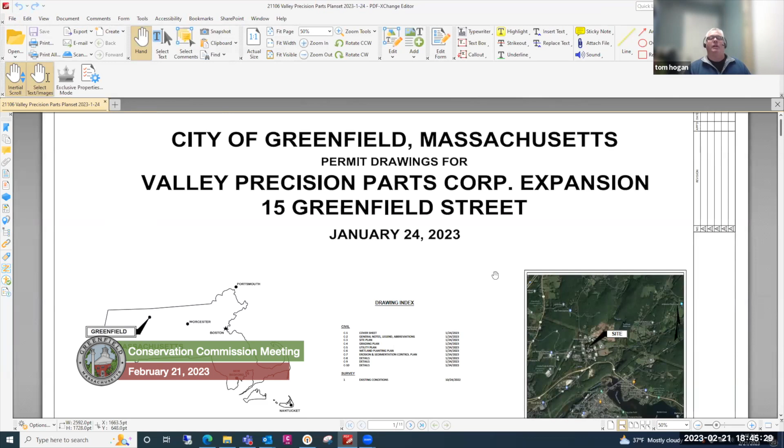Oh, I thought I saw Steve. He's muted. I'm sorry, can you hear me now? Yes, sir, sorry about that. No worries.

My company goes back in Greenfield about 50 years, and we've been at 4 different locations in town during that time. We've been at our site on 15 Greenfield Street since 2008, and it's been a great location in the industrial park for us to grow. At that time we had 28 employees; we now have 205 on the site.

So we've done 2 previous additions on the building. We renovated it in 2008, added 5,000 square feet towards Adams Road, as you see on this map, and then the new building, which is disconnected, in 2018. That's allowed us to go from about 25 employees to 205.

If you drive by our building right now, it's kind of a mess, which we don't like, meaning there's nowhere to park, particularly at shift changes. So we were able to acquire the land behind us, the parcel where the proposed larger parking lot is, which is a lot of wetlands, but there's usable space out front. We thought it'd be really attractive for us to continue to expand employment by being able to park in that area.

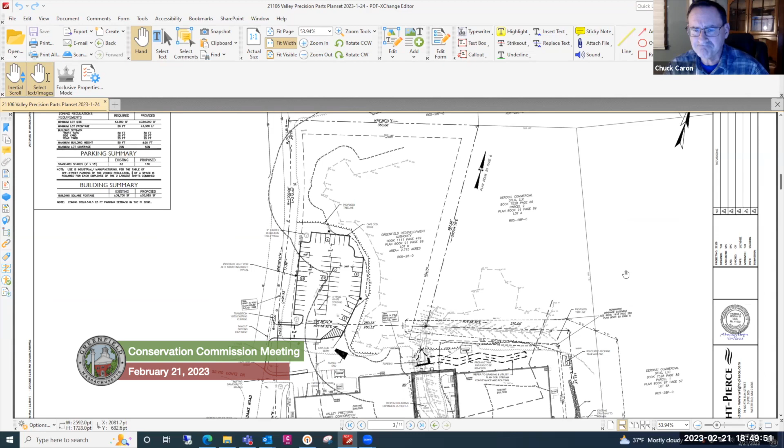For resource areas, there's also a strange feature that runs along the back property line. It's a fairly deep ditch that has a little bit of evidence of flow in it and some wetlands vegetation along it. From what we can figure from the history of this site, it looks like that was constructed in the late 70s or early 80s when this industrial subdivision was originally developed, to divert that stream channel between the two buildings now. Except either they never finished it, constructed it wrong, or didn't maintain it, because that channel picking up flow from the intermittent stream isn't receiving any at this point.

So we have the buffer zone from the BVW that extends into a good part of the work, and we have the intermittent stream channel and some bordering vegetated wetlands in the area between the buildings where we're proposing to do work. I don't know if you want me to get into mitigation now, Tom, or go into more details of the design first. I had wrapped that up in my next segment, Chuck. Okay, maybe I could go over them and we'll find something of particular interest to the commission.

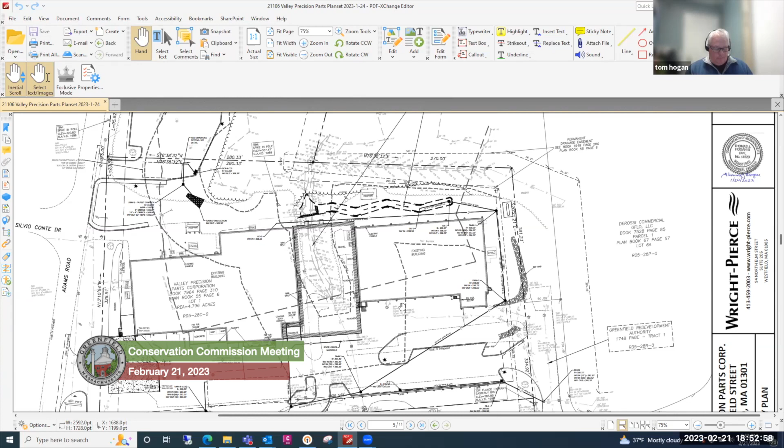But in the overall big picture, we understand the presence of that area between the two buildings is currently carrying water, so we've developed a mitigation plan to address it - in essence, turning it counterclockwise about 90 degrees or so and mitigating what we see there at greater than a 1-to-1 ratio. We also, in order to comply with our stormwater management obligations, have provided stormwater control for construction activities as well as long-term operation and maintenance plans and post-construction operations.

Our stormwater management best practices proposed include deep sump catch basins, Contech stormwater treatment units, ADS isolator rows, slope stabilization measures, and outlet pipe energy dissipation. Using those means, we're able to demonstrate balance at our analysis points as shown in our stormwater management report. As Mr. Capshaw indicated, there's a variety of things occurring at the site, but taking the whole site as a whole and looking at the mitigation for each individual component, we believe the proposal as shown achieves the performance standards under the Act. There's a great deal of detail in the stormwater report as well as the plan set, and we'd be glad to answer any questions you may have.

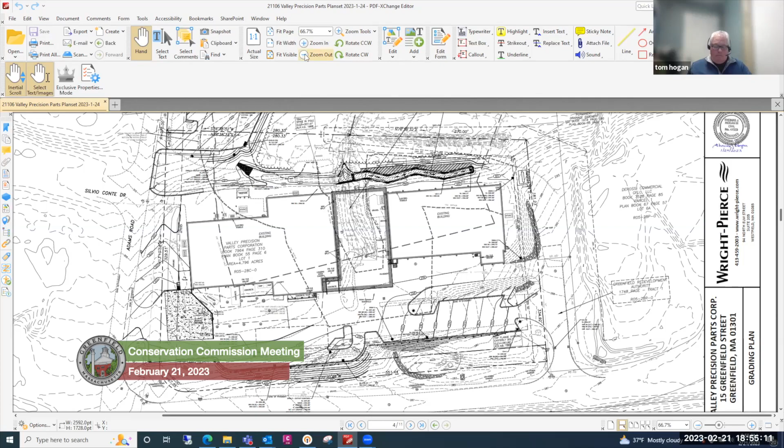Do we have any site visit photos of that area? Yeah, I can pull those up.

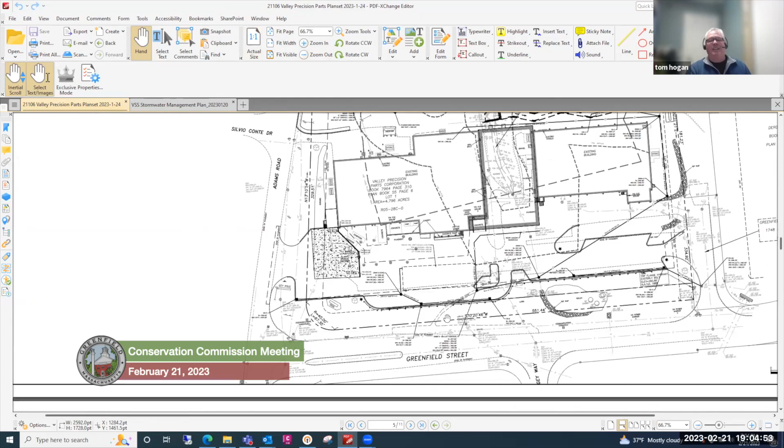I would say that we tried to balance the best we could while keeping a responsibly graded parking lot that'd be safe for vehicles and users, and again, with the environmental considerations of the slope stabilization. But our goal was to keep it as flat as we could, as natural as we could.

Is it the case that you'd have to bring in fill, or will somehow the removal be used? It's not a big swing either way, and to do that calculation I would have to figure out the volume that would need to be brought in anyway for the gravel base for the parking lot. Just looking at it, I don't think it's a big swing one way or the other. I'm not seeing a big one, cut versus fill. I think the idea is that's going to be as close as we could make it.

I think the biggest thing we would want to understand from that data is whether there would be a significant impact on the resource area. So if that information will help us make that clearer or won't, I don't know, that's my personal opinion on that. I'm happy to provide it, it's not a very intricate calculation, we could certainly pull that together.

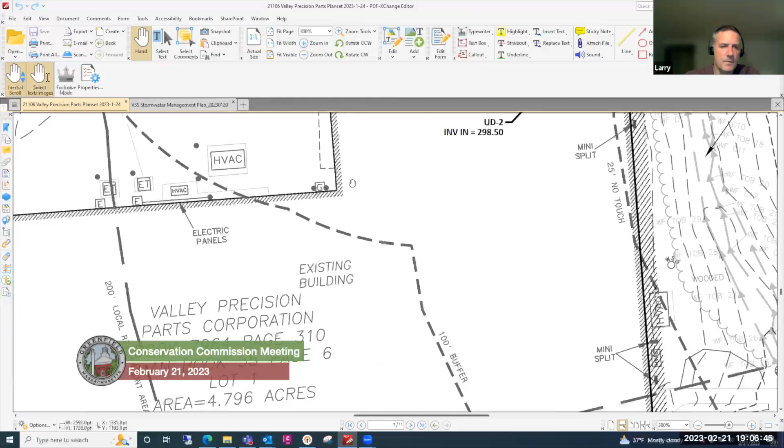While we're here, there's another heavier dashed line that overlaps with the 100-foot buffer that I don't see a label for. Can you explain what that angled dashed line is? Yes, that's the 200-foot local riverfront area. So that comes down, comes across, and then goes back up, and that's associated with the intermittent stream, then the closed drainage system that goes underneath the existing. Does that help? Yes, thank you.

Can we, while we've got the plans up, talk quickly about the stormwater management plan? Because there's a lot going on here. Yeah, there is, it's complicated. There's, like Mr. Capshaw said, really three sub-projects within all of one here. So this is the utility plan.

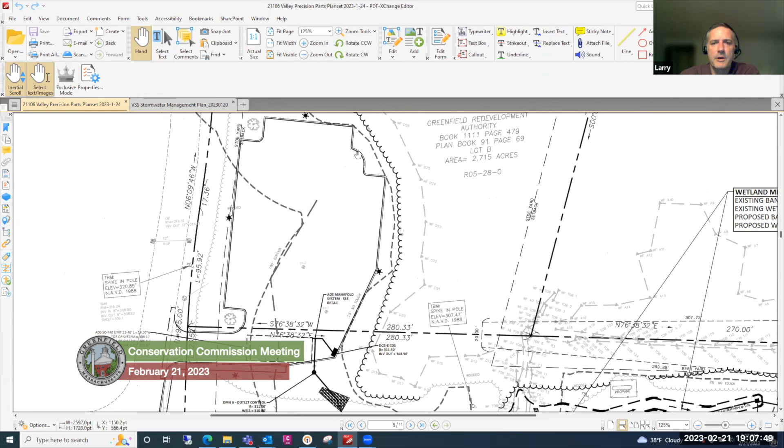Pretty much the new paved parking area will be pitched towards a low point where there's a double grated inlet. That'll go through a proprietary CDS unit, which will then overflow into the subsurface ADS system. Larger storm events will then, after going through the ADS system, go through a multi-stage outlet control structure prior to discharge.

So that structure has been sized for the 10 and 100-year storm events, and that output is provided in the stormwater management report. So those are the proposed utilities within the expanded parking area.

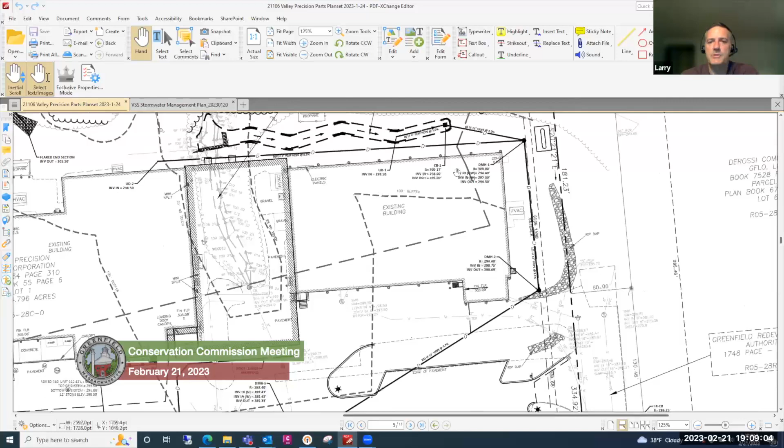We can talk a little bit more in detail about the wetland mitigation, but this conveyance channel will then go to an area inlet, be diverted around the existing structure and tie back into that same closed drainage system that goes underneath the existing parking lot and then outflows adjacent to Greenfield Street. So there's deep sump catch basins, drain manholes, HDPE pipe that will then tie into the existing, I believe it's an 18-inch pipe at this location here.

The expanded front parking area is pretty much the same thing, where we're using deep sump catch basins at the low points of the site along the front, which will be tied into a CDS unit as well at this location. That'll pre-treat all the stormwater entering into the ADS system.

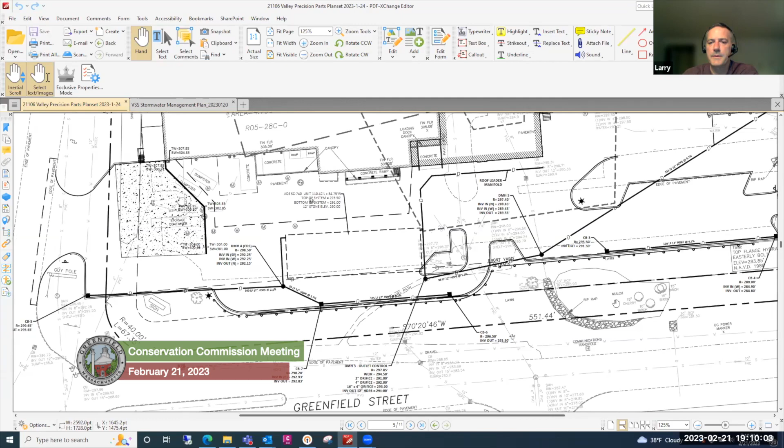This system will also have a multi-stage outlet control structure located right here, DMH3, and the overflow or outflow associated with that will then also tie back into that existing closed drainage system prior to outflowing along Greenfield Street. So there's basically three areas of stormwater management we're proposing: the expanded front parking area, the reroute around to the existing, and then this larger front subsurface pond to mitigate the increase in impervious area.

I have to say, I'm a little worried about the parking area and the impacts to the wetlands. If we're changing the grade and routing the sub-watershed flow, under existing conditions going from north to south, from south to north, how that's going to impact that wetland, and to go all the way up to the 25-foot and inside the 25-foot makes me a little bit nervous.

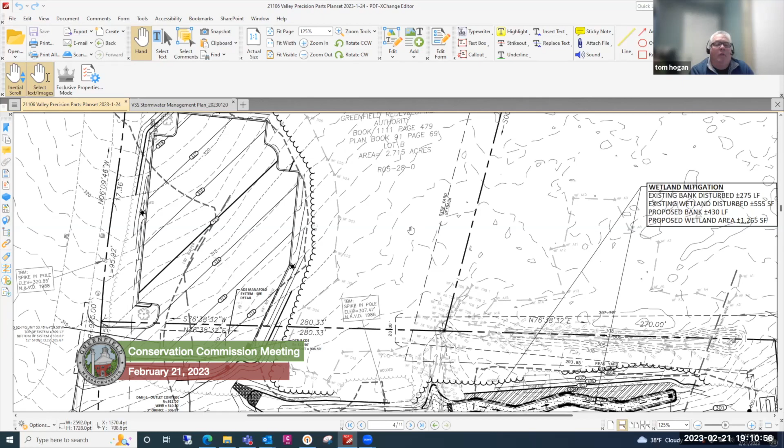I understand and I appreciate that. When I look at it and I think about the contours and how that wetland system is -- Larry, can you zoom up just a little bit? Yeah, I was just trying to, on that same sheet. I just want to go a little bit higher on that, same sheet.

So if we look at the contours here and I look at the cut slope, when I think about adjacent wetlands and the concern I normally have -- people have different concerns, but mine is if I was going to have a major cut slope near a down gradient system, how I might intercept water that would otherwise be feeding it. The contours on the upper areas, aside for 2 or 3 we have, generally run perpendicular away from our parking lot -- perpendicular in a northwest to southeast fashion -- so that our parking lot wouldn't be acting as a subdrain in essence.

And then as you go down to the bigger part of our parking lot, it quickly turns into a fill situation. Larry, can you go to the northeast part of the parking lot where the curve is, just to circle that area? The new parking lot out back, yes.

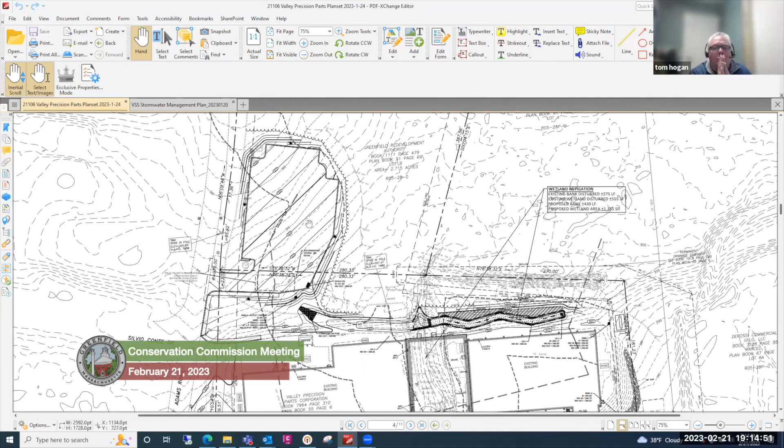I would hope it wouldn't intercept with groundwater -- I was thinking more about surface water. Just that the natural subwatershed is currently shedding from south to north, but after the establishment of 58 parking spaces, that whole area will now shed from north to south. So how would that impact the adjacent BVW? Well, it's a very small part of the surface water tributary area, because you only have surface water runoff feeding into the wetland there, from the wetland line to not even quite to Adams Road.

Anything to the west of Adams Road is captured generally in the roadway system. Even east of Adams Road, you can see there's a slight rise. So from about where that tree line is towards Adams Road, it's going to Adams Road and not into this wetland right now.

Is that in your stormwater analysis? Is that explained in your justification? Yes, we provide the subcatchments and the time of concentration, the flow analysis lines and the rates and all of that. That is correct, it's towards the end of the report.

If I could just add real quick too, as Chuck and Tom were saying, the grades of Adams Road are pretty much pitched from northeast to southwest in this area. Although there's a defined crown down below here, the upper portions of Adams Road are pitched to the southwest a little bit as well. So really the subcatchment area is from the edge of pavement, somewhat a little bit into the road. So the areas that shed water or subcatch stormwater runoff to this wetland are pretty much the same.

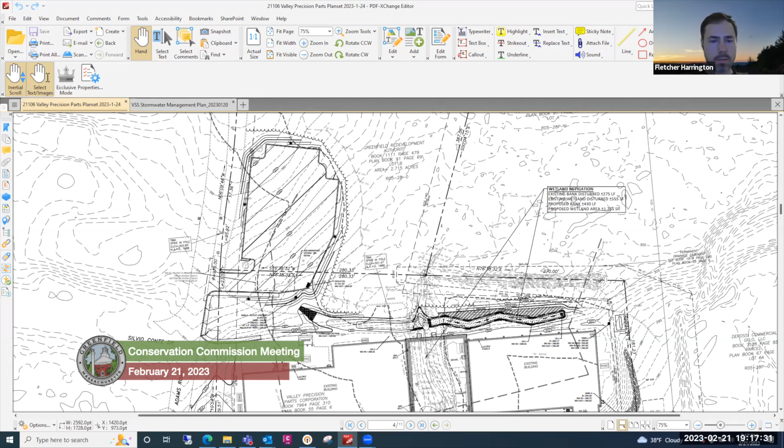So right now there's a small drainage ditch from a drain or culvert type structure going from west to east, that we saw in one of the pictures, that connects to the current system.

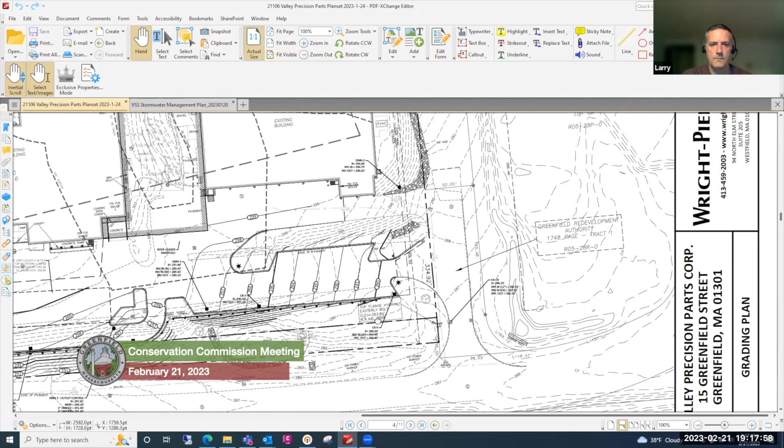That is now going to be this new one. I think he's talking behind the western building. If you go to roughly the southeast of the parking lot as it's on the plan there, in the northwest of the plan. I'm just wondering about this drainage structure, you can see a big sort of black area right below it. Is that an outflow? Is that water just shedding from the parking lot, or no?

That'll be the proposed outflow from the stormwater management system. It's shown with some fabric and riprap.

So that's surface flow, right, that proceeds to the new channel in this plan? That is correct, yes, based on the grades and contours, combines with the southerly flow that's existing. And so does that significantly increase the water that's going to be loading that new channel compared to the existing channel, or no?

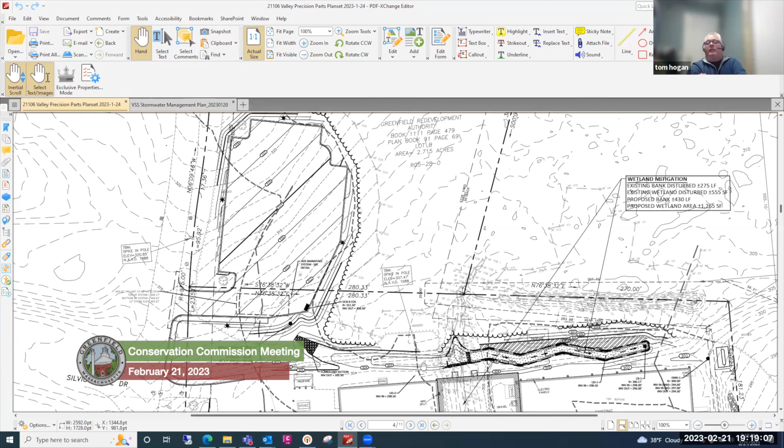No, we don't think so. We think that because of the mitigation in the parking lot, the infiltration that'll be there, plus the slowing volume of the flows, we tried to make it so it would be very similar to what is there today. So more or less the drains that take things underground will offset what might otherwise be more flow, or more unimpeded impervious flow.

Yeah, that's the idea. The subsurface best management practices that we're proposing are designed to offset any increase in the transmission of flows over the impervious area.

So what we're also trying to say is this outlet control structure balances through the storage volume, releasing controlled flow to mimic what's there today for those same storm events. So it's sized with a low flow orifice for the smaller storms up to a 2-year storm, then an orifice for a 10-year, and then a weir for the larger storms. That'll provide more retention time within the system, and then balance it through the outlet control structure.

Got it, I see the flow better now. In that basin, is there some type of treatment system in it to catch solids below the parking lot there? That is correct.

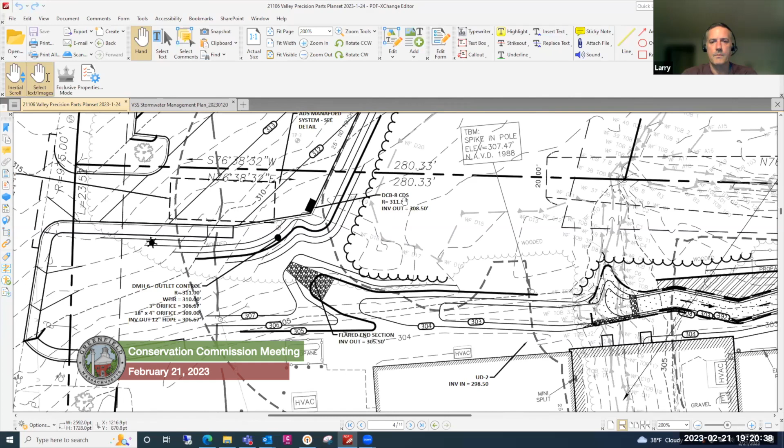It's a Contech CDS swirl chamber proprietary device that can be a grated inlet, so that'll be coordinated through the shop drawing process. And then the system itself will be an ADS crushed stone with the arch type of system, and that has an isolator row as well for pre-treatment prior to spilling over into the other adjacent chambers. So there's kind of a belt and suspenders for TSS removal, spill prevention, by the combination of those two units.

And the TSS worksheets are within the stormwater management report.

While we're on this topic, is there a detail of that system that you could show, to provide a visual? Sorry, I'm just scrolling quickly.

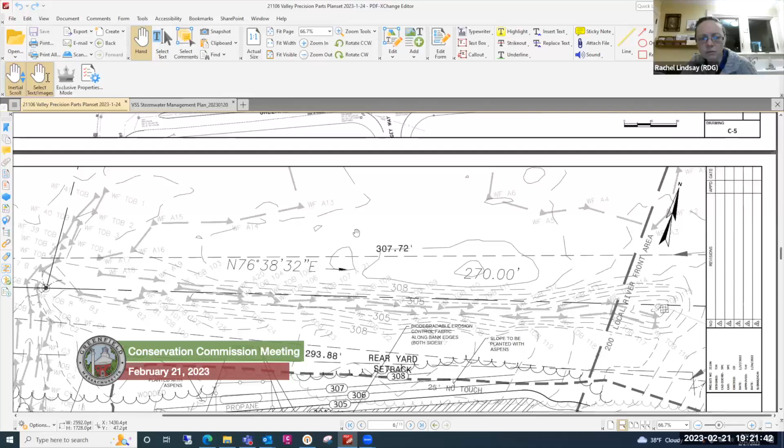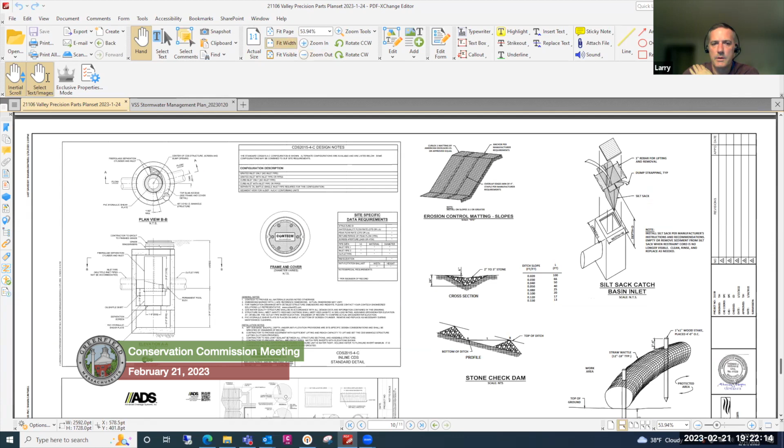And I believe on this sheet, this is the proprietary Contech CDS swirl chamber unit, so there are 2 of those proposed. And then these are the detailed cross sections of the ADS system - the stone, the fabric, and the ADS arch type system. There's a manifold system that balances all of the stormwater going into each chamber prior to it outflowing through the outlet control structure.

As detailed in the stormwater management report, there's, like Tom mentioned, long-term operation and maintenance, periodic inspections, cleaning, and so forth. That's all described within the stormwater management report.

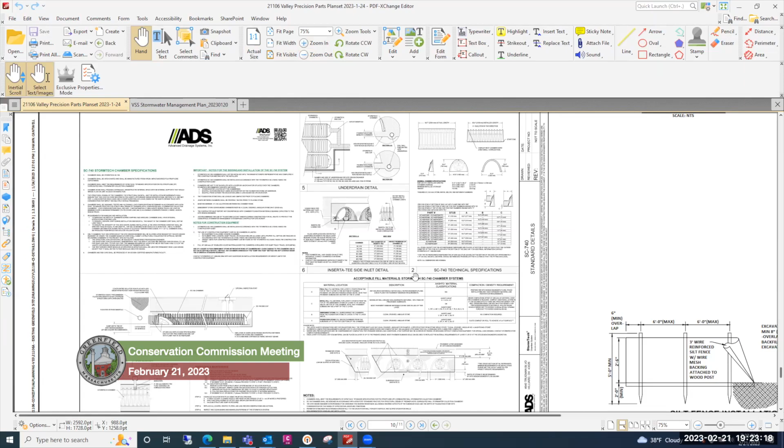I know we have a DEP comment letter that was pretty insightful, but I also wanted to ask about the mitigation really quickly. Are you doing BVW and bank mitigation on a 1-to-1 or 2-to-1, or just? It's not 2-to-1, but it is more than 1-to-1. I don't recall the exact number, I can check that quickly.

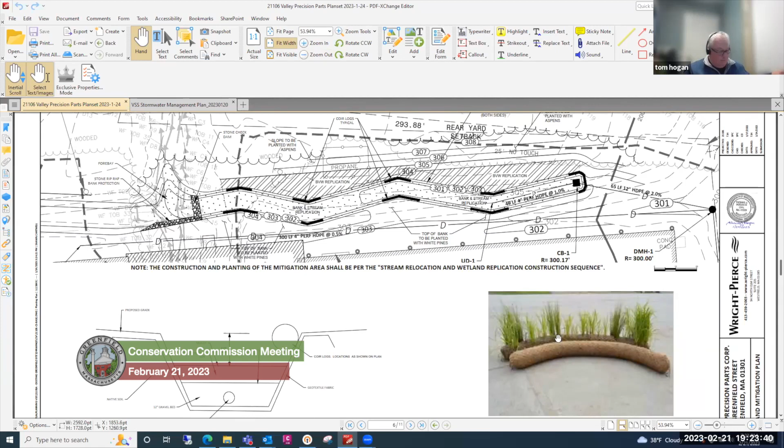So basically, you can see in that detail there, the stream, the bank and stream replication. We tried to keep it in kind of the same juxtaposition to the channel that the existing BVW is in, a narrow strip along the channel. So that crosshatched area north of the new channel is the BVW replication.

I think it's going to be over shortly. Chuck, I could add - yeah, I think the bank is 1.56 to 1 and BVW is 2.28 to 1. Okay, so it is more than 2-to-1.

And then I'm assuming in the NOI somewhere you have a table summarizing the impacts and your replications? Yeah, we have that on the form and in the project narrative that we submitted. Perfect.

We have a detailed construction sequence and planting sequence for this area, because we basically have 3 different types of plantings. We've got what we're planting in the stream and how we're stabilizing that, what we're putting into the BVW, and the graded slopes to the north we're going to plant with aspen, trying to create a little strip of woodcock habitat. Then we've got some white pine conifer plantings between the channel and the building to provide visual screening for wildlife, as well as dense cover.

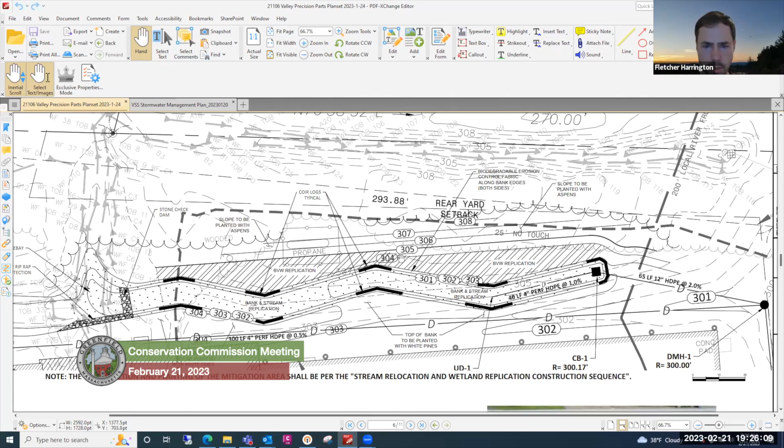Sorry, I'm just trying to find the existing drainage ditch there. Yeah, there really isn't a drainage ditch on this side. The drainage ditch, it's in your pictures - oh yeah, that one is way up there, right? Yeah. Oh, okay, okay.

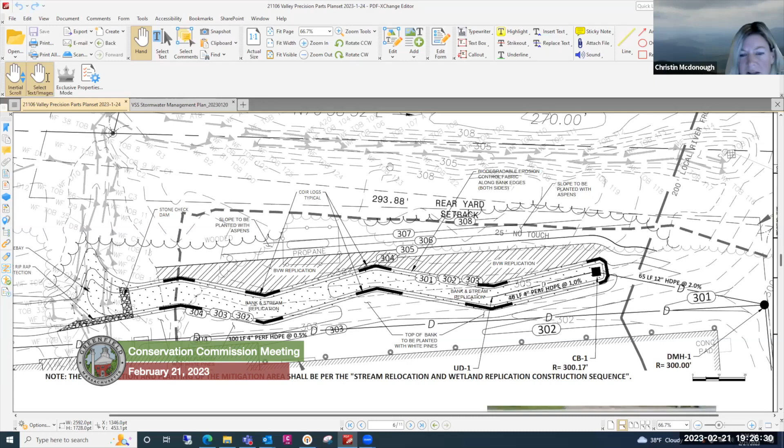And your planting schedule, what sheet is that on? That's in the documents that were in the NOI submittal, not on the plan. But we do call out, like Chuck mentioned, the white pines and the aspens. And the hatching kind of represents the locations of the BVW.

I'm trying to get to it - you want me to stop sharing? Yeah, let me see if I can.

Trying to find a restoration plan for you. Where is it? The sequence, Chuck, I can't find it. Page 38.

I'm hoping I didn't forget to give you that after I did it. We got the habitat checklist. Oh, there - yeah, okay, it's right near the end of the NOI submittal documents.

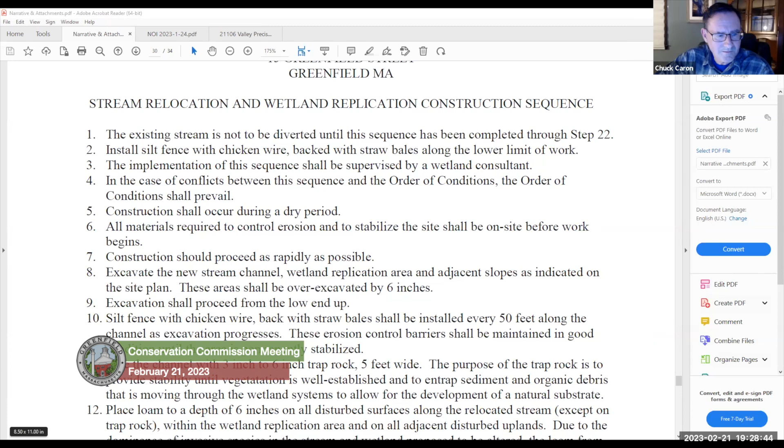So we've specified 3 different planting and seeding areas: the stream channel itself, the BVW replication, and the upland slope. The channel we're going to seed with an erosion control restoration mix for wetland sites, using New England Wetland Plants products—I always recommend them for these kinds of things.

We're using their wet mix for the BVW and their conservation and wildlife mix for the upland slope. We'll plant the actual banks of the new channel with winterberry and swamp dogwood, and within the wetland replication, plant it with swamp dogwood, winterberry again, along with gray birch and red maple. We've got the row of white pine along the southern edge I mentioned, and then plant the upland slope with quaking aspen.

Should we jump to... sorry, go ahead, Rachel.

With this planting plan and the work on site for the new parking lot, do you have a sense of what the tree removal to create that parking lot is like, and what the ratio of trees you're including in the mitigation is compared to the vegetation being removed?

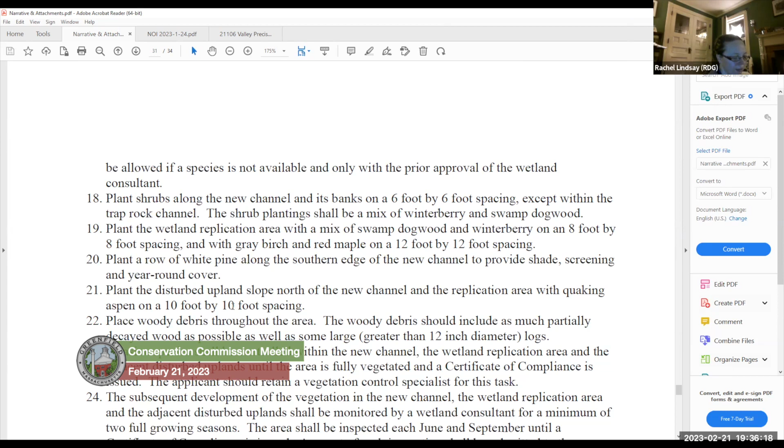This is just a comment, I'd love to see some oaks in the planting plan since there are oaks being removed. If it was my building, I'd rather have oaks than white pine that close to my building, but that's entirely personal. White pines are a native plant that completely come with the spirit of it, but that's just in terms of habitat value and replication for the site.

Yeah, I was just thinking of the dense cover from the pine, especially when they're younger, but really any species would work for what we're trying to accomplish on that edge of the stream. We could do a mix of them, I suppose.

I'd love to get to this DEP comment letter, because there's a couple comments that are pretty dense. I'm not sure if you have it, but I believe Mr. Caron had also submitted some responses to that.

We did do that, maybe we could get that on the record in this meeting. Do you have that handy, Mitchell, or should I try to find it? Mitch, do you have the DEP letter to share? Yeah, I should have that. Let me stop sharing, I should have the response as well.

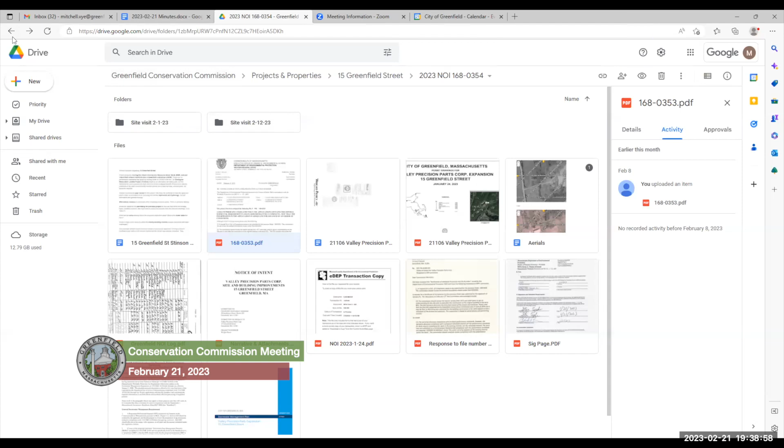Chuck, did the boundary change in your delineation at all from the Ward Smith one from 2018? No, there were a couple places I was a few feet below his line, a couple places a few feet above it. It was basically the same, more or less the same.

And then the delineation on site matched almost exactly what was done for the 2018 addition, or building I mean. Got it, I think this is all of what I found, which looks pretty similar to me, at least for this part.

Did we get an as-built for the building? What about the parking lot and the wetland to the north, do we have any data from Ward Smith for that? I don't think so, that wasn't part of the scope of the previous submission. So that wetland was delineated for the first time in October, 2020 — no, I delineated it, Ward had done it, I think, for the redevelopment authority.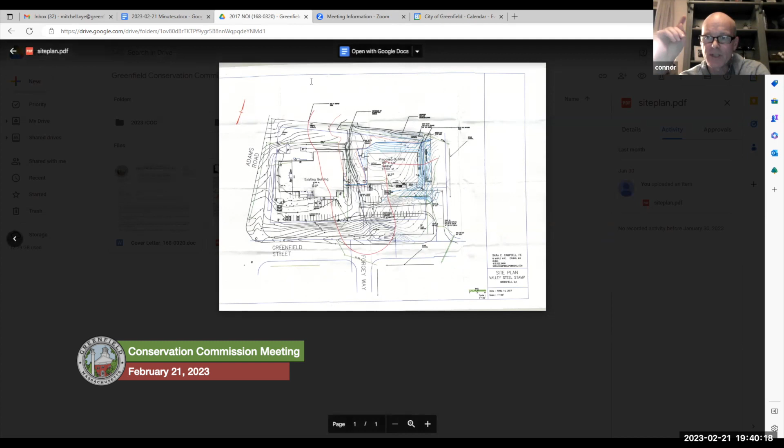Yeah, I could jump in on that. Ward did it, they wanted to sell me the land. I said there's no way I'm buying that because it's wetlands and I can't build a building on it. I said you need to delineate that, so I talked to MJ Adams, who I think is on this, and the town had it delineated, the GRA, and that's where Ward Smith came in.

Okay, and that was 2018? No, that was like last year. Oh okay, yeah, all his flags were still there and visible when I reflagged it.

Just a procedural question, Mitch, in terms of the agenda here: should we be reviewing the OOC before this? Can we approve an NOI logistically before there's an OOC? I was going to bring that up if it felt like we were reaching a motion. I think MACC recommends doing the COC first, which is why I had them submit the RCOC, and then we can postpone this till after that discussion.

If we feel like we want to do that — I think Mark Stinson wanted a request at least submitted as well. Yeah, I don't think we can approve an NOI with an open OOC because you can't have two different DEP numbers valid for the same property. So if we found that we needed to request any changes before being able to issue an order of compliance, we would need to do that before being able to issue a new NOI. That's my understanding anyway.

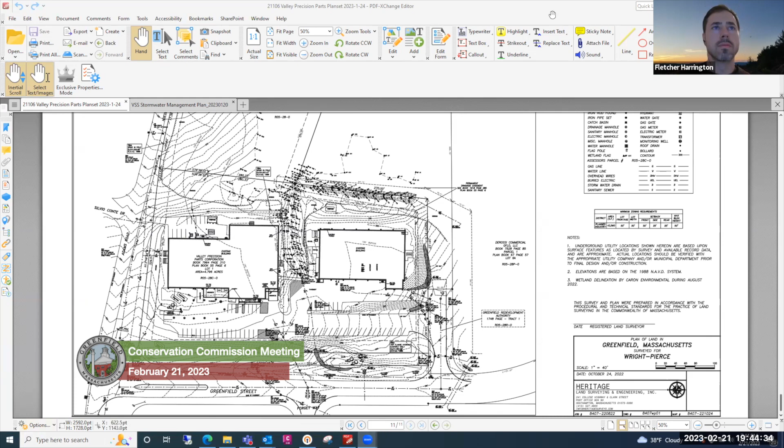Should we continue on the DEP comments? I think there was a chunky one about resource area impacts that I didn't totally understand the response to. Yeah, that was also an outstanding question I had. Which number is that? Do you want to go through each of them? Let's go, I think it's number 3, but let's go to number 2 because that one's also... oh sorry, go ahead.

So we have number 2: the commission should review the historic aerials from 1971 and other years to get an understanding of the site prior to and after the construction of the original building in the early 1980s. The NOI narrative discusses the disturbed nature of the stream and wetlands. Please note that the first NOI submitted to the Greenfield Conservation Commission was in June of 1973, and it may be that no NOI filing was submitted for the building construction or for what appears to be a relocation of the stream and wetlands. This supposition is based on aerial photos and permitting records.

Mitch, were you able to look into that at all? Yeah, I pulled up some aerials. I mean, they're old, I don't know how helpful these are. We don't have records that go back that far, I think.

The way it's worded is because the applicant is stating that they suspect the stream where they're proposing to relocate was originally relocated, and that's further justification for future relocation. So it's like... well, no, I guess I wouldn't say that. I kind of took that comment as just that, a comment.

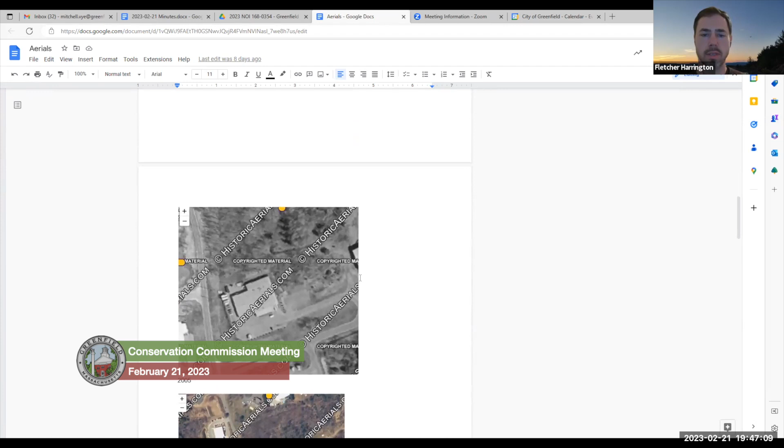That makes sense. I don't think it really matters, but I think it is relevant in the sense of the historic hydrologic pattern on the land there. So I just find it relevant in the sense of looking at whether the system was truly rerouted, relocated drastically, or if it's just degraded, or what.

Not that this is going to tell us much, but in '71 it looks like it was left vegetated around a channel that's roughly in the same spot as the existing channel that goes between the buildings. Who knows, 100 years ago that could have been moved by a farmer or something.

Can you point out specifically on the '71 photo where we're looking here? See that little strip of forest that goes down? That is the channel, as far as I can tell. Okay, thank you.

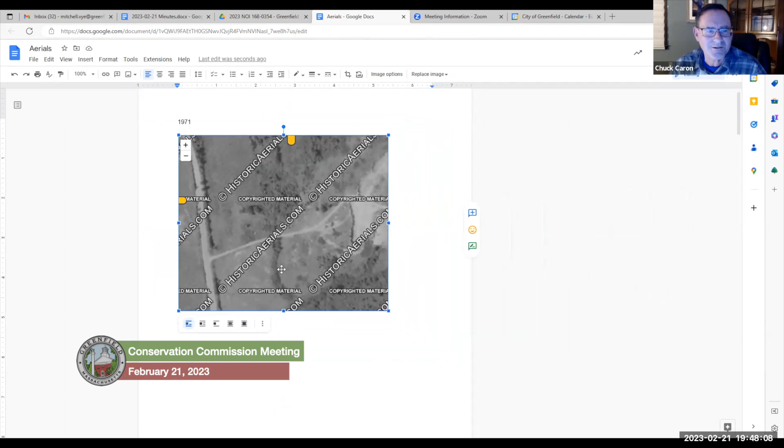What's that road that's above it? It's probably just an old... that little strip, it looks like a road. I'm not sure. Do you think that's more northerly then? I'm almost thinking where the crosshairs are there might be this... I was assuming that what's showing up as a little dirt road is the subdivision road. That's to the east there. There's a big open area, a sand pit or something up the hill, or I'm wondering if we're too far up now as we're looking at this. But if we go down, we can see it in context to the building, I think.

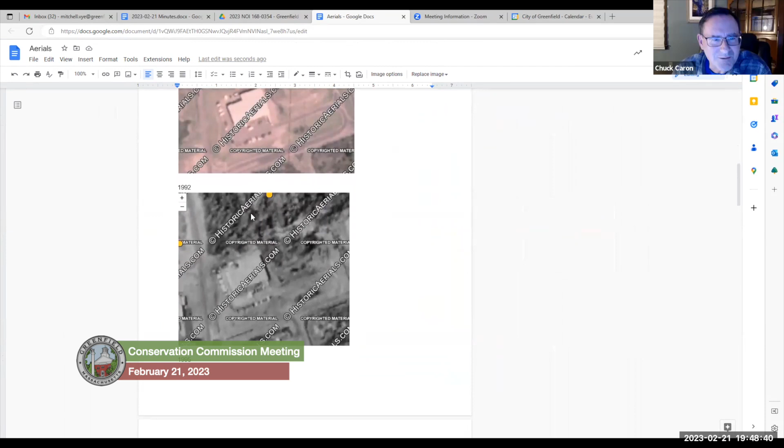Hmm, not much, there's no good landmarks on that '71 photo, are there? Yeah, we can see the ditch there in that one, the 1992. Mitch, if you pulled up this particular website, maybe we just zoom in and out real quick to get a better orientation here.

I know, when I say from the site visits in 2018, from my memory of the site visits with Lord, and Phil Luttrell was also involved at that point, it does match the description of a disturbed system - clearly a built system that has been neglected and overgrown. So that is what my memory of the site is as well.

Yeah, looking at a recent aerial with tree cover and without tree cover, it looks like that first historic aerial from '71 is actually from north along what is now Butternut Street, and not the system in question.

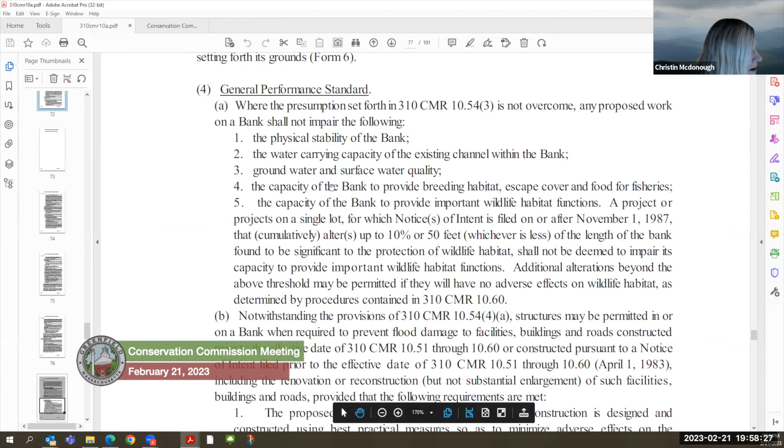So this is 10.54, which is bank, under general performance standards. Where the presumption set forth is not overcome, work on a bank shall not impair: the physical stability of the bank, the water carrying capacity within the existing channel, groundwater and surface water quality, the capacity of the bank to provide breeding habitat—there's a wetlands wildlife habitat, a detailed wildlife habitat data form in the NOI—or the capacity of the bank to provide important wildlife habitat functions. Again, go back to that 10.60 detailed wildlife habitat evaluation. Notwithstanding the provisions, structures may be permitted in or on a bank where required to prevent flood damage. That's not really relevant here. And so that's pretty much it.

So personally, I would like to see some kind of argument made for how this relocation of the stream channel is improving the water carrying capacity of that bank, and how you're improving the surface water quality, the groundwater quality, and the wildlife habitat value and quality, to demonstrate how you're meeting those performance standards by improving the habitat and relocating the stream. That's my personal opinion.

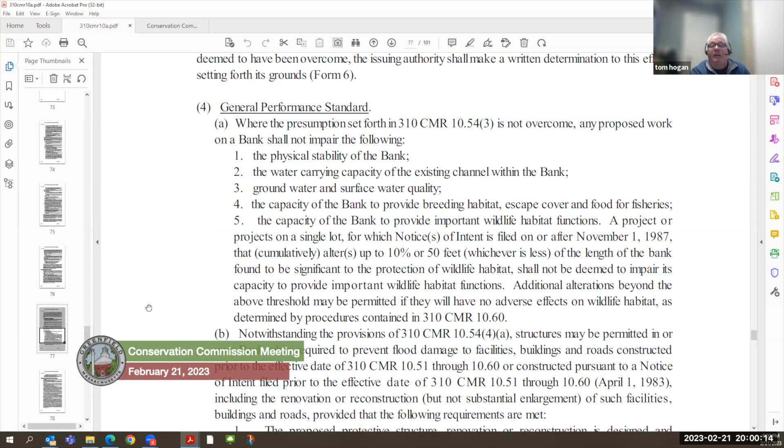Well, we can address that for sure. I do see Mr. Karen's point, it's a subtle one. What it says is any proposed work on a bank shall not impair the water carrying capacity of the existing channel within the bank. But it doesn't say that has to occur within the existing bank, and that's exactly what we're doing, and that's why you replicate. We've demonstrated clearly by representation, testimony, and drainage computations that our drainage system does not impair those characteristics.

We don't really have the replication standards like we do in the 10.55. Well, I think it's those five standards there. I just want to finish this one thought. What I just said was pertaining to the hydraulic, number 2, the water carrying capacity of the bank. I didn't mean that statement to address the other meaningful comments that the chair had brought up.

I think we've done that. I think we can do that if we need to represent more. That's what we're here for. If there's ideas that we could do it better, we're all ears. We feel very strongly about that hydraulic element, and we think not only does it make common sense, it satisfies the criteria. That's why we propose it, quite frankly. So if there's anything else pertaining to the other elements, we'd be glad to try and address those too.

I just want to finish my comment, regardless of which interpretation is correct. When I see the physical stability of the bank, to me that means the existing bank. If you're building a building over it, then that's different, but regardless of which it is, I yield to Chuck's experience. If he's seen it interpreted different ways other times, that's fine. But my only point in bringing up the fact that the existing proposal might not comply with these standards is just to say, if we're already looking at something that is a significant variation, or if there's significant interpretation going on as to how this project fits in with the act, and we're really looking at the overall improvement of the site...

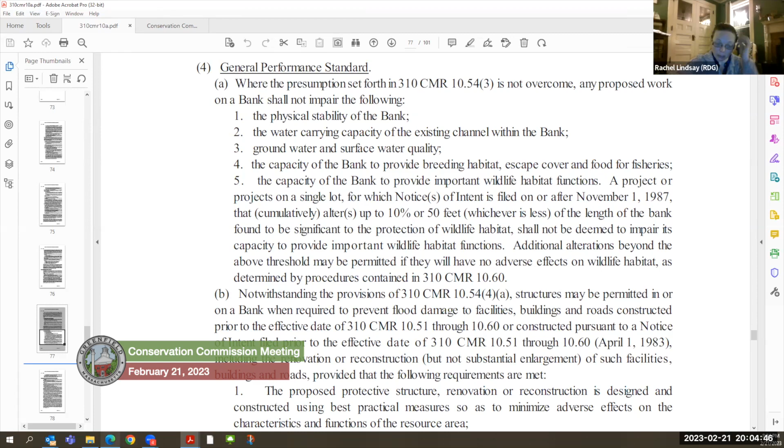Is there anything else, any other questions from commissioners about this particular question? Should we move on to the next question from the DEP?

You want me to keep it on my screen, Rachel, or do you want to flip it back over? Or Mitch? No, this is fine. Okay, if we're done. Actually, hang on, do I have the original DEP letter? I can't pull up the DEP letter and the response letter at the same time because I only have, unless I log into the Google Drive in 2 different browsers. That's okay, you can scroll down to question 4. Okay, all right, so I actually have the question verbatim from DEP in that letter. Okay, perfect, thank you.

Mass DEP notes the project proponent's use of the Mass Stormwater Technology Evaluation Project, or MASTEP, as a reference for alternative structural stormwater BMPs to address TSS removal, that's total suspended solids. As this reference website is no longer active, out of date since 2014 and no longer funded, Mass DEP suggests that a comparable alternative resource that may be considered to demonstrate compliance with TSS removal may be found at the following link. The underground stormwater chambers are subject to UIC program requirements, and then there's another URL link.

Yeah, we acknowledge that. It was probably improperly referenced. The performance of the system remains unchanged and remains compliant. I was thinking of waiting till after this hearing to redress that report to reflect that. Okay, perfect. Shall I move on to number 5, or do the commissioners have any more discussion on number 4?

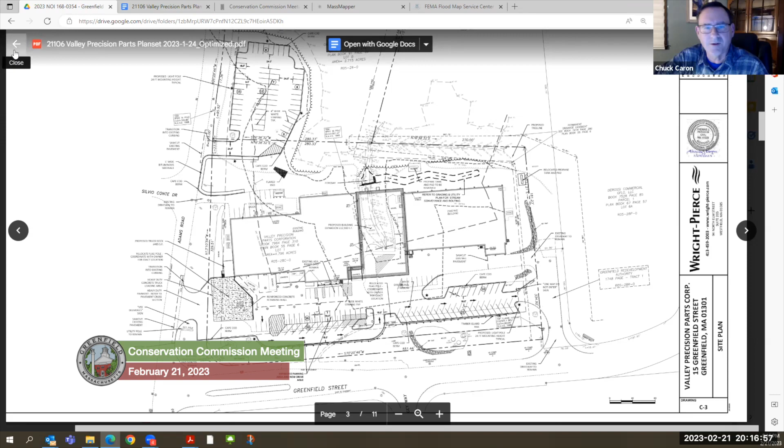But maybe Chuck or someone can talk about this, but there seems to be very little detail on the constructed wetland, at least in a plan sense, visual sense. We have a cross section there. Well, we have a detailed blow up of that area we were looking at on the plans, and then we have a 3-page construction sequence for that area with a lot of the specifications in there. Yeah, there's a lot of detail, I thought.

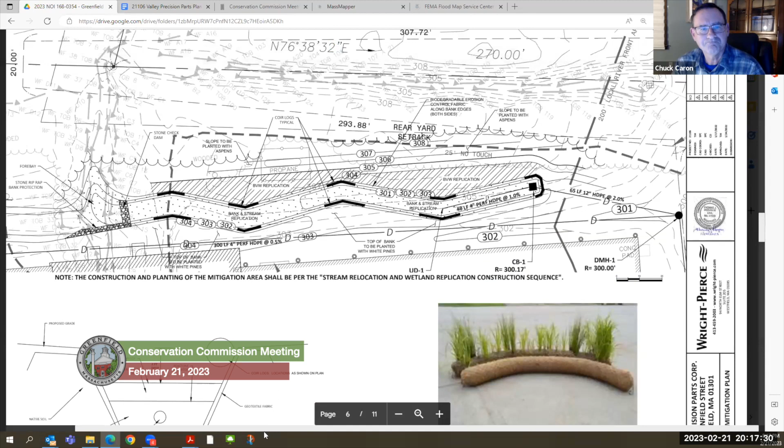I'm just saying for understanding the situation on the ground there, I'm only speaking for myself. Has Mitch had a chance to review those elements? I've looked it over, yeah. I think you would have a better understanding of it though.

Well, we tried to provide a great level of detail to have a good educated discussion along with dialogue that's in the notice of intent and stormwater management report. We tried to detail it with real information, just to the level that normally the industry would.

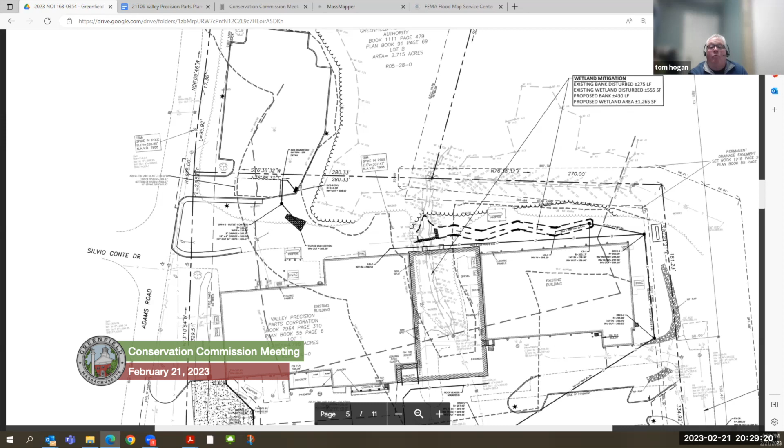I wish I could say that it was. My opinion is it won't, because that channel is not taking flow in that fashion. Although I wish it was performing to the level that a 36-inch RCP pipe at the end of it would be justified. Larry, can you zoom in that quickly, please? I have control. You're turning the corner with the mitigation - if you just turn the corner a little more to the north, you would be in the channel, is all I'm saying. Does that make sense?

We have other elements we need to address, because regulated areas technically now occur within the area that we're going to displace. Our understanding of the act is we need to replicate those. This structure is not only performing the hydraulic functions, which is part of the performance standard Kristen has read, but also the wetland elements, the bank and the BVW - this is what we're using. So the way I've thought about this, if you turn that 90 degrees counterclockwise, it's the bank.

Do you talk about the flood storage capacity at all for the underground structure and loss of that? Okay, yep. I just feel like this is a lot of information.

I don't know, I would feel more comfortable having somebody who is devoted to just reviewing this single project come with comments and advise the commission, who are volunteers, on anything outstanding in this application.

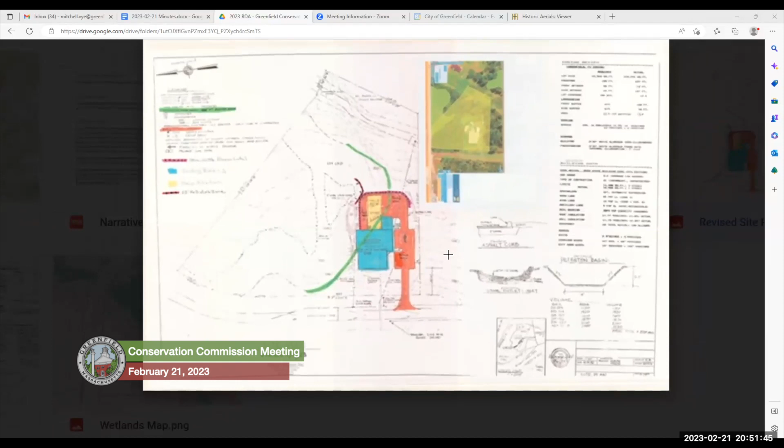So we did resubmit another map just to make things even more clear from what we submitted last week. I know nothing was able to be finalized last week based on what we submitted, but I'm hoping this one would make it easier for everyone to understand. We're essentially putting up an addition in the back parking lot of our building.

That's in a paved area. I know it looks a little grainy, but I think you guys were probably able to get this earlier. Everything is color coded to make it really simple. As you can see, the existing building is blue, the parking area is orange, and the proposed expansion is in yellow.

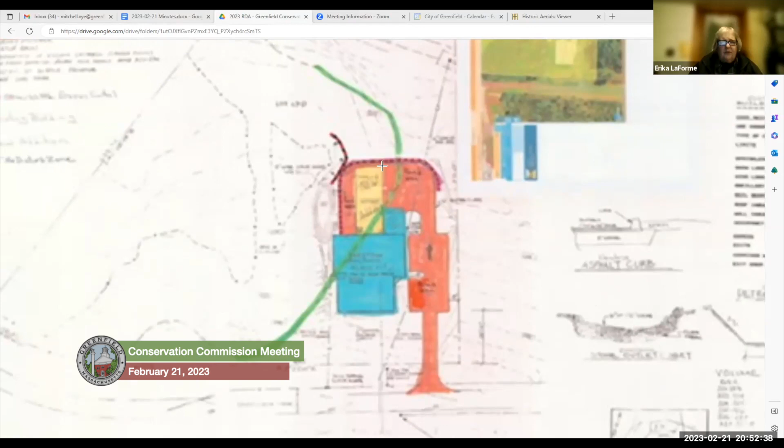I'll clear up some of those lines that are shown. The 100-foot buffer zone is in green, which actually goes through the existing building, through most of the new addition, then cuts through the paved area and proceeds back beyond the backside of the lot. The paved area that's existing is in orange.

There's an area that was mentioned that needed to be shown for erosion control, which is in a pink and red marking line that goes around the paved area. Just inside of that, which is pretty clear once you go onto the site, the edge of the paved area is the 25-foot no-disturb zone, shown in that red and black line that goes through the back left corner of the paved area.

So you can see that the addition is not in the 25-foot no-disturb zone. It's already on the impacted area of that paved area. So you can see the setback.

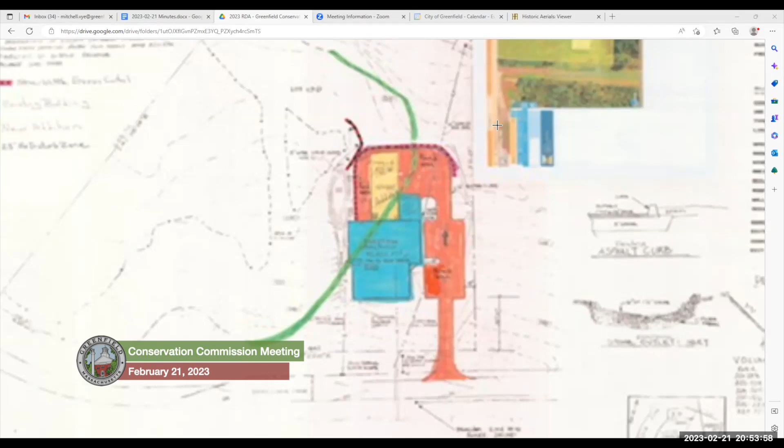Got it. This expansion is all above ground. There's no subsurface excavation, correct. It has frost walls, but it's all slab under. There's no basement area, nothing going under. There's no basement, correct.

And again, it's for ice storage of the existing facility. The existing facility has the ice machine and has storage inside, and that was how it was first designed. Due to increased business over the last couple of years, they need some additional ice storage, and that's the additional 5,000 square foot addition.

So then, just to be clear, no vegetation clearing, working 100% in pavement? Yes, that is 100% correct. The paved area that's all in orange, where that new addition is, that is all paved area. So there is no removal of vegetation. Correct, it's impacted, it's hard surface. I guess that's what we can tell you there.

So there's no tree removal, or you just said no vegetation removal, Kristen, right? That was my question, yeah, got that. And no subsurface excavation, so it's just on top of existing asphalt. Correct, yep.

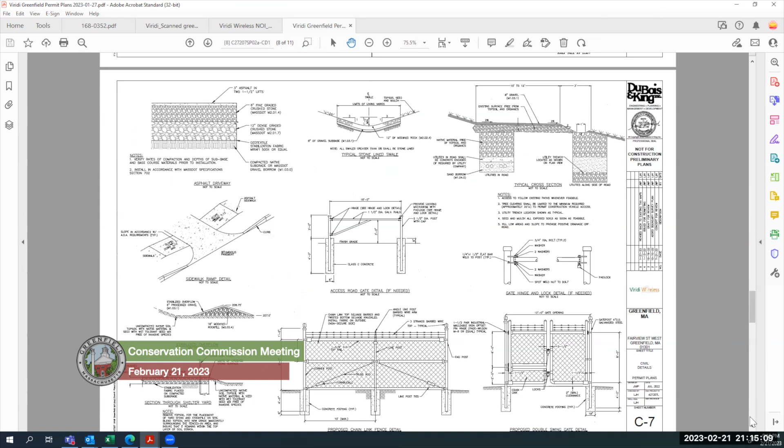I don't see the diameter called out. I think the standard is, what is it, 10 inches, 12 inches?

It doesn't look very steep, right? No, it's not. There's an embankment off the road. You can see these contours. It drops about 8 feet from the road, but then it's pretty level. And this will be built up to make a level pad.

A level compound. I always think the bigger the better when it comes to those Filtrexx socks, especially since once they get wet, the wood chips kind of settle down. I don't know what the standard industry sizes are, but if you had a 12-inch, that would be preferable to me.

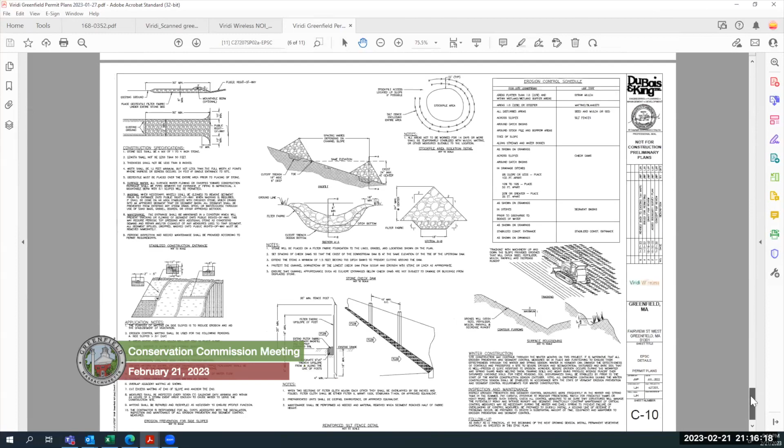Just looking at the plan here, I see SF, which means silt fence. I may have misspoken. I would have been okay with the compost filter tube if that's preferable to the applicant. I don't know what the other commissioners think.

But yeah, silt fence and wattle's fine too. I mean, it's just more expensive maybe, and requires a little bit of digging, I guess, compared to the sock. Yeah, I would be fine with the compost filter sock.

I think, Kristen, what size did you recommend? I was thinking the bigger the better, but actually now I'm just noticing, can I annotate on here? Oh, I can't. But on the north side of the proposed drive, it looks like the silt fence line stops. Yes, here. I mean, it looks like the grade's kind of going to the west over there, but I wouldn't mind seeing it extended a little higher personally.

Sure, and that's the same on the very south end. Well, actually, if you've got a filter tube, you may as well go a little bit further with it, but I can see why you didn't put it on the southwestern or southeastern corner because there's no resource area down there. Right down here, it just ends at the base of the hill.

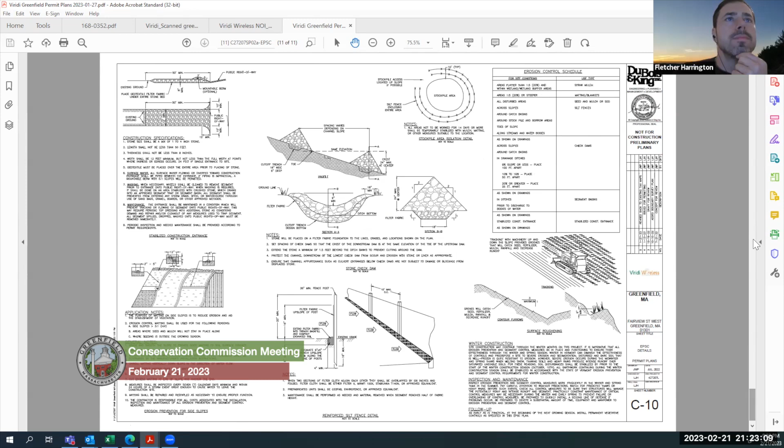I saw that in the narrative. Is that something the commission would want to condition, how that would be treated? I think if it required ongoing maintenance, we'd just be interested in hearing how that would happen, and making sure that it's noted in the order conditions if one were to be issued.

This relates to a comment from DEP, asking if the applicant had investigated relying on the natural drainage, the infiltration values of the soil on site, to capture sheet flow rather than building a man-made structure to slow it down and infiltrate it. Yes, based on the question of ongoing maintenance and whether that berm would essentially degrade in the future.

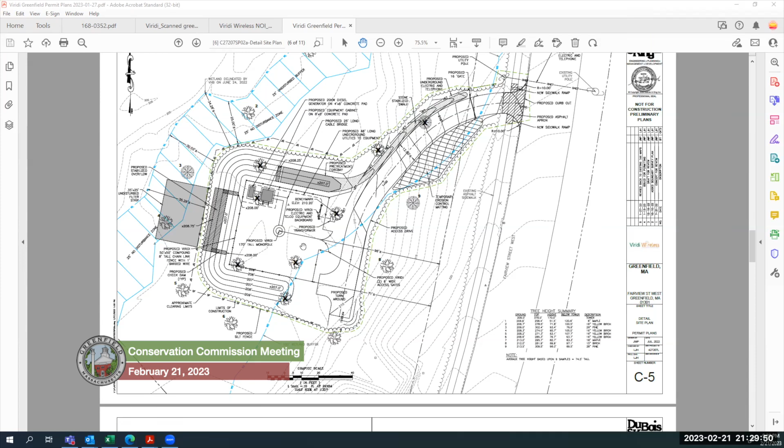Not being the civil engineer, I did not develop a maintenance plan, but I imagine it might be possible to remove the forebay and the swale and have a crushed stone apron that does not collect water and so would not accumulate sediment. That's my understanding of what Margaret was getting at, and the engineer said that would probably be appropriate if we wanted to go that route—instead of the contoured C-shaped basin with an overflow, have it a crushed stone surface, just level.

Kristen, can you point out which document Mark's comments are in? I'm having trouble pulling them back up again. Oh sure, I can do a screen share. Actually, I have them up, okay here. Great, oh okay, thank you. Oh, I see, it's right there. Yeah, okay.

So is he saying this doesn't comply with the stormwater standards? No, he's saying there's two things: we didn't state that we confirmed the soil type, which we did, using test pits—well, we did it during the delineation with hand augers. We didn't need to do an infiltration test. With HSG-A soils, which are well drained, he's asking—of course he doesn't want to tell us how to engineer the site—but asking if there's any actual need for BMPs.

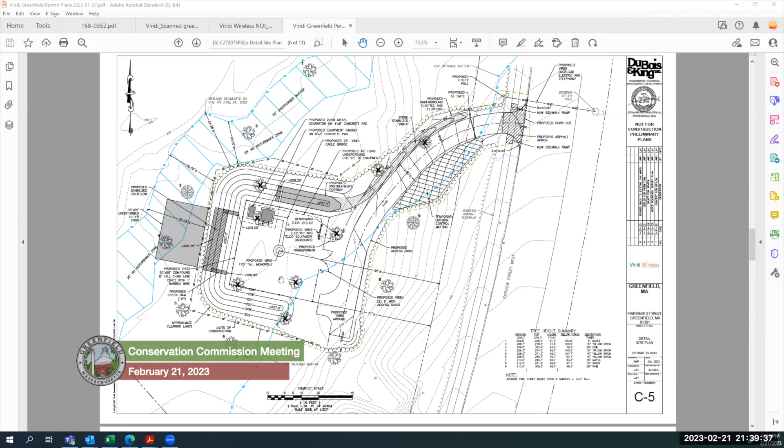And I'm sorry, did you say it was 5 by 5? It's never in my 30 years exceeded 5 by 5, it can even be smaller than that. Okay, so then I think I misread. So were we talking about crushed stone around that square area? Yes. And do we think that would still be crushed stone even in the case of no embankment, or would that also be vegetation relying on soils, maybe needed for maintenance? Typically the compound is entirely surfaced with crushed stone to prevent vegetation and the need for maintenance, and to allow personnel to walk around unobstructed. So this area would be right here under the pole. Okay, that helps.

So I think we can continue this. Do we want to continue this to the next meeting, or is that only a week away? Or do we want to shoot for the meeting after that? Kristen, am I getting this wrong? Erika, do we need to set a particular date, or do we just continue to the next one and then continue it again? It would help with our agenda creation, we have so much business right now, which is a little unusual for us. I think that actually makes sense, to name a particular meeting. Yeah, I think we have to, in terms of legal ad and abutters.

Does the applicant have an idea of the preferred date? Mitch, do you have some upcoming meeting dates? The 28th, March 14th, or March 28th. The engineer will be back by March 14th, so if that's convenient for the commission, we'd appreciate it being continued to that date. Sounds good, I don't see why not.

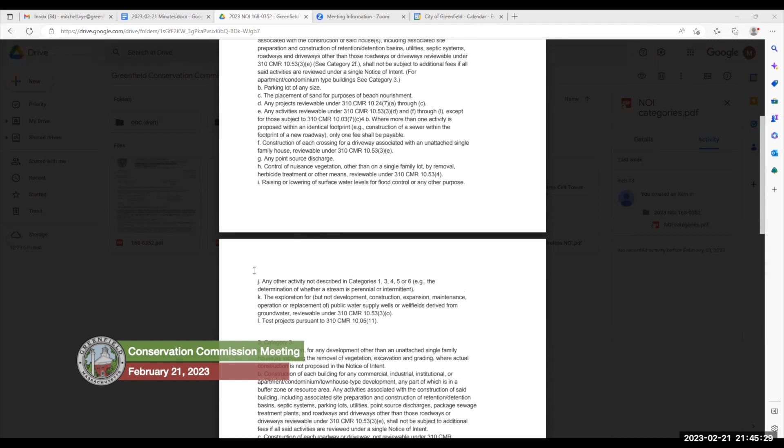Well, since you're continuing, you want to just double check that and get that straightened out. Sure, good idea.

Trying to find my cheat sheet. I have a cheat sheet for filing, never find anything I need. Is there anything that connects the amounts to those descriptions that we could verify it that way? Here it is, oh yeah, like from the check.

Well, yeah, that's how we submitted it, as total project fee of $500. So you filed it as category 2? Okay, yes, that's a two.

Okay, yeah, if we could just verify that. Well, it sounds like it's under the right category, but just an incorrect notation on the form. Is that what other people are understanding, or is it still a question about which category it belongs under?

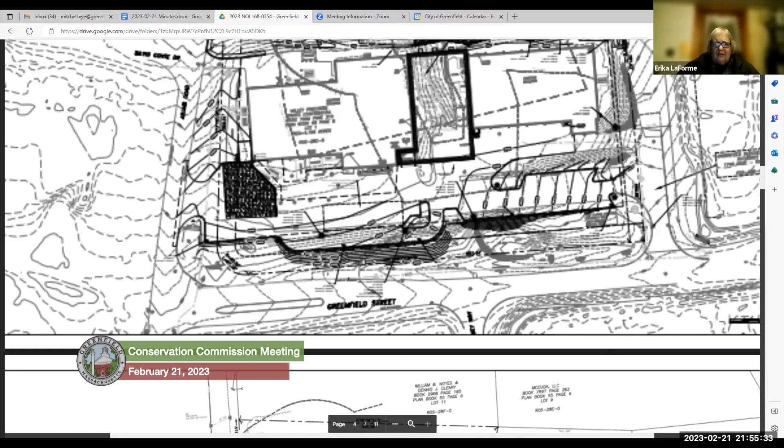So I mean, I guess this is what he was referring to, just checking if this is what exists now. Why is that blurry, is it my eyes or is that blurry? He was showing us a different one, I think. Wasn't there? That looks better. Wait, these are the new plans. That's the new plan. Oh, okay, I see, it's just loading, it's slow.

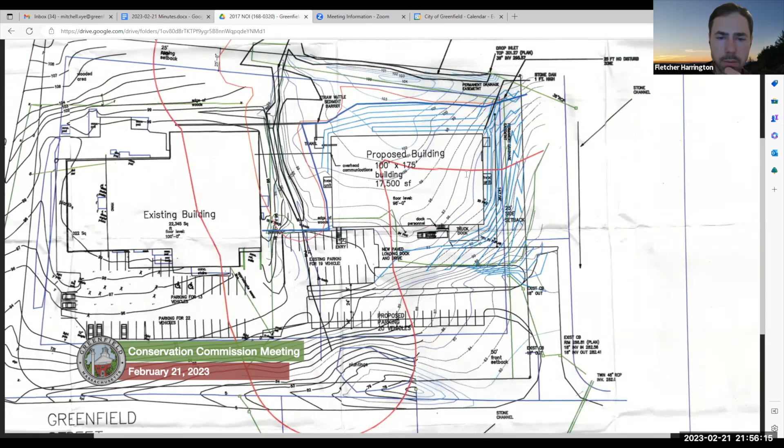Okay, and then the permitted plans are in the 2017 NOI. Right, so this is what they submitted originally. That was the only plan for the other building, right? Yeah.

It's hard to see them side by side. Gotta open up two browsers. Yeah. The site plan. Yeah, I guess that's why a letter is helpful.

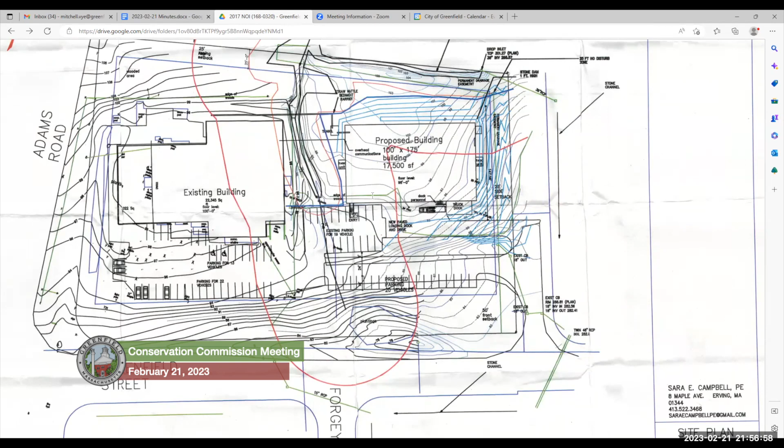Well, we've been on site since then. Just walked around the building. Yeah.

I'm just pulling these up side by side slowly. Well, the buildings look the same, but what about the parking? Almost there.

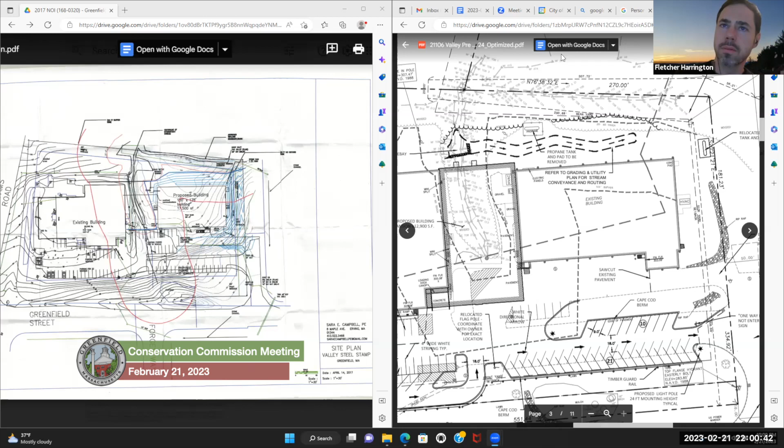Yeah Mitch, can you put this on the agenda for before the new NOI, for when this comes back up? Does that make sense? Well, I think hearings have to go first, but we can always vote to do it later. Oh, I'm sorry, just yeah.

Right, just because we don't put it further down — it's not required that we close this before issuing. I mean, Rachel mentioned something about there can't be two DEP numbers for one site, but is that a hard and fast rule as far as... you know?

There must have been like 15 old orders that were, they were like, please close these out, but they were all different projects throughout the campus, different parcels. Yeah, some of them were even maybe the same parcel. So maybe if it's the same project, same parcel, I don't know, I think that makes more sense.

And like you said, I saw the MACC page as well, and it just recommended it. If it was mandatory, I imagine they would have stronger language in there about that. So...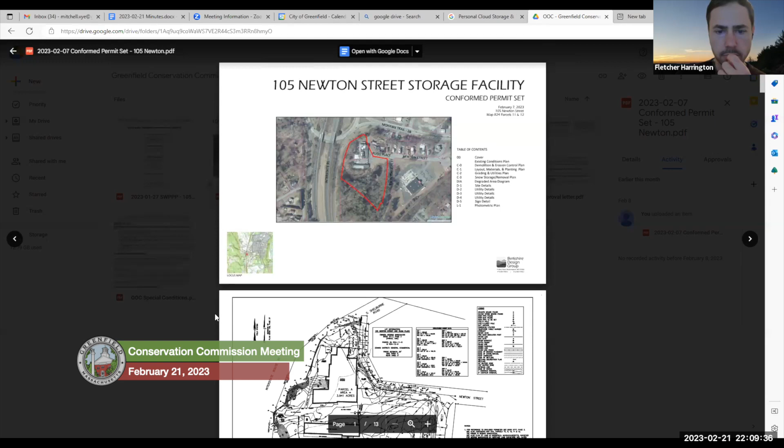And there was no visual - was there an updated plan set or no? Yeah, because they keep talking about remove this detail, remove that detail. I think we need more than a couple minutes to really digest all that. And Mitch, the NOI you just pulled up isn't updated, right? Or the plans you were just pulling up? In other words, the only new documentation is this narrative, is that right? I'm just trying to remember. Been out of it. Okay.

But I feel like maybe we want to discuss this with them. Yeah, definitely. It looks like that plan is dated the 7th of February though, so maybe that is new. Maybe that was submitted with the comment. Yeah, I think this is new. 105 Newton Street, 2023.

I think it would be good to have the applicant present this and explain. Maybe some of them are negligible, but like the stone mulching in the vegetated gardens, I didn't get that. And the veg swale, I don't really get that. And the additional impervious surface area - I would like to actually see data, not just hear that, trust us, it's negligible. And I didn't even finish reading past that. Yeah, sorry, I'm a slow reader.

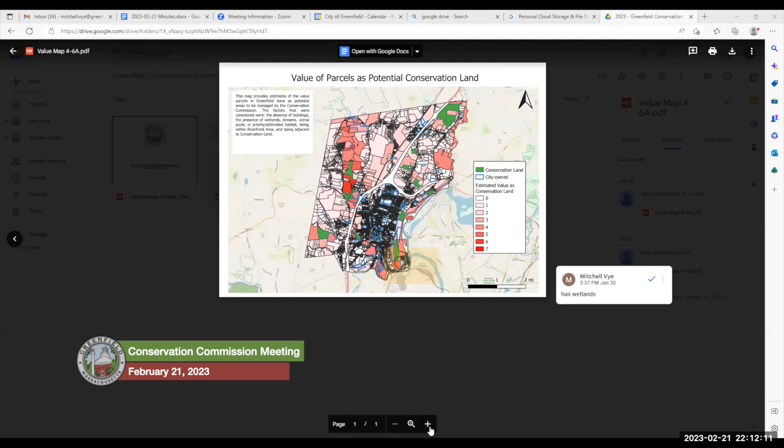Got it. So it's less than 5,000 square feet. I think it's just like this area. Oh, so it's not on the riverfront riparian corridor. Wait, but isn't that right? Does it abut any other open space? Yeah, I was gonna say, abuts - isn't that Abercrombie Field? Yeah, it is. It abuts a property that's used as open space.

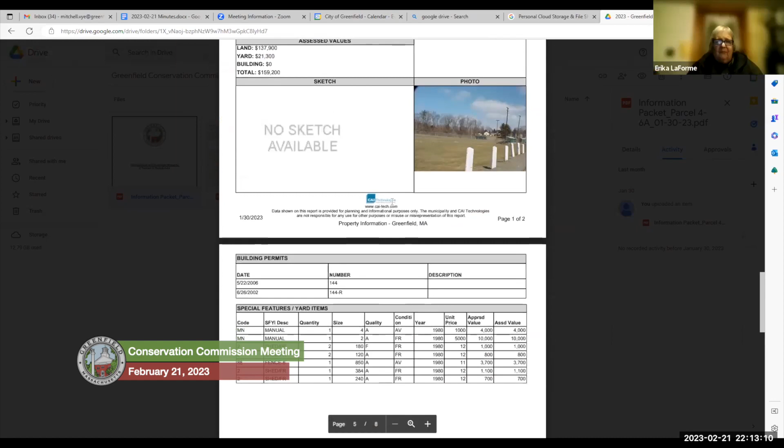The area that's being sold is just like around the parking lot.

Oh, it wasn't the parcel, it's just a portion of it. Is it the wooded part? No. Why did they highlight around the building, Abercrombie Field, on that sheet? I don't understand.

Yeah, I think it's part of that parcel. But how many square feet is this part? Is it even less than 5,000 square feet? Okay, so it's pretty small.

It's a sliver of that excess land that's going up for purchase. Is it that wooded area behind the field? No, it's just around the building here.

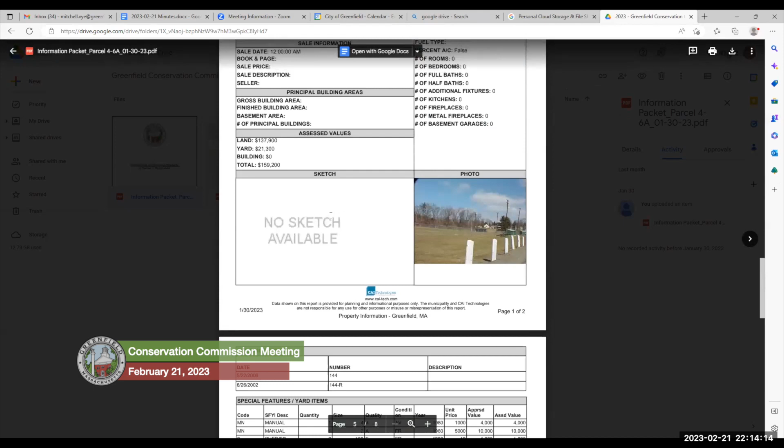Why is she selling it? Who's gonna buy it? What do they want to do with it? For expansions, renovating the parking lot. So to be clear, 5,000 square feet is 0.11 acres.

So whoever owns the school is asking for it. If it were abutting existing open space... the person buying it, I believe, is a person who owns other apartments in town. Oh wait, it says right here, future development project. Oh yeah, it does.

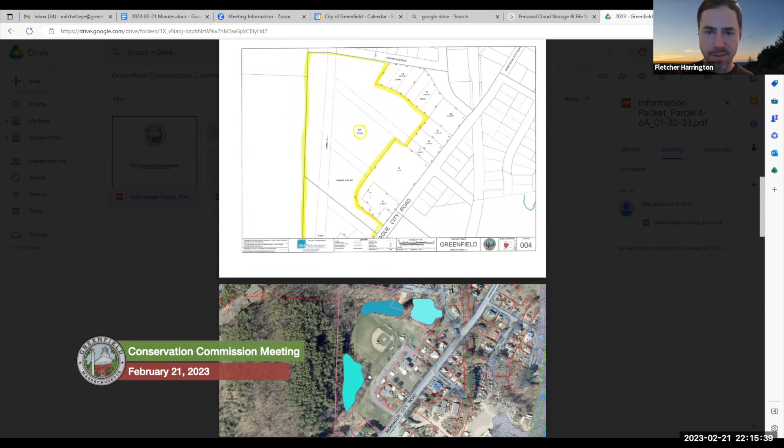I just can't get over that the highlighted parcel is misleading, like whoever made these maps. It's not that highlighted parcel there, it's the little one where your cursor is, or is that not true? The highlighted parcel is Abercrombie Field, if you go down to the ortho, right? The pink parcel. Yeah, it's misleading, I think.

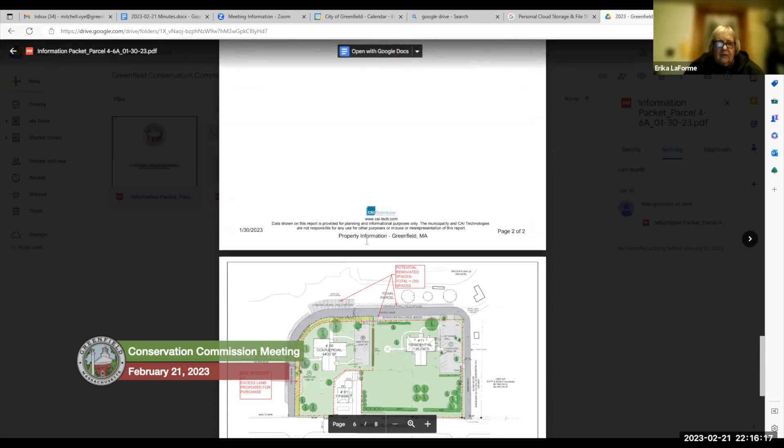Okay, I just want to make sure it's not just me, because then the piece below it shows just the small thing along the road there, which would be... parking? Is this just a parking lot? It said it's for expansion, future expansion. 6A is the parcel, so 6 is there.

Selling a portion of this parcel. I guess because it's a portion, they've highlighted the entire thing. How can you do that though? Unless it's not subdivided or protected. It's not protected open space, so they can carve off a piece to sell. And does it meet zoning requirements without subdividing it?

Oh yeah, I mean, you can. Usually it comes down to the zoning requirements as to whether you can carve a piece off a parcel to sell to a private landowner, I believe.

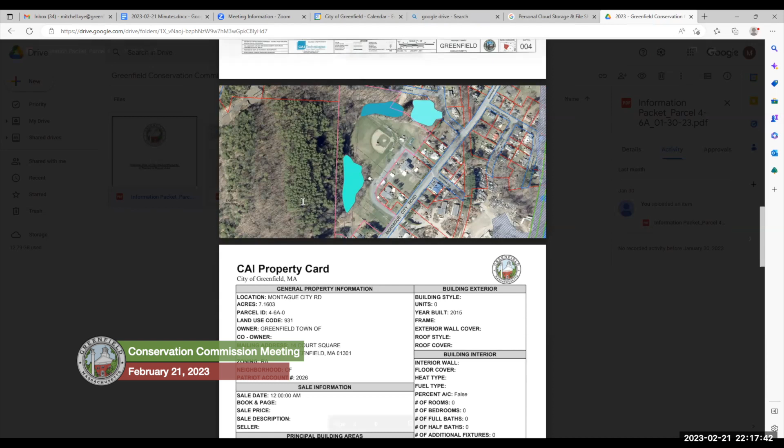Okay, well, Mitch, can you remind us of our role in these particular cases? It's just, we can give our input, basically a motion for a positive or negative recommendation to sell, if we feel like we want this land.

I don't see how we would use this, not the small sliver of frontage here. So it's right fronting the road, right? Yeah.

Yeah, nice to have a bit more narrative than this. I don't know, those pictures are showing putting up buildings, apartments, isn't it? Yeah, so they're taking existing open space and converting about 0.12 acres to no longer open space. It sounds like that's what's going on.

So it also looks like, for what it's worth, that existing parking area is within open space. So maybe what they're doing is just converting this existing parking area from open space to acknowledging that it's not. I don't know what that area looks like on the ground.

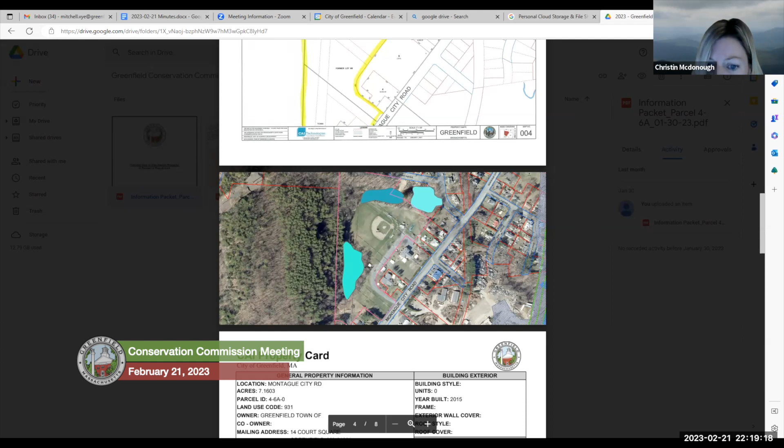Is that parking associated with 71 Montague City Road and 61 Montague City Road, or is that associated with the ball field? Does anyone know? I assume the ball field, not sure though. I assume the ball field, and that's why they want it.

Well then, where would people park at the ball field in the future? Yeah, I'm not sure, I think that might be an issue. There's a lot of missing data here. Are they proposing to move parking to a different field and then sell the existing parking to somebody else to do something with, you know what I mean? There's a couple land use changes in there that I'm confused about, but I don't know if it's valid to our role.

I think for conservation commission, we just determine if it would be valuable as conservation land, right? But, correct me if I'm wrong, this is the section that has a bunch of buildings pre-existing already. Is that the wrong piece here? It's the piece in the middle, right?

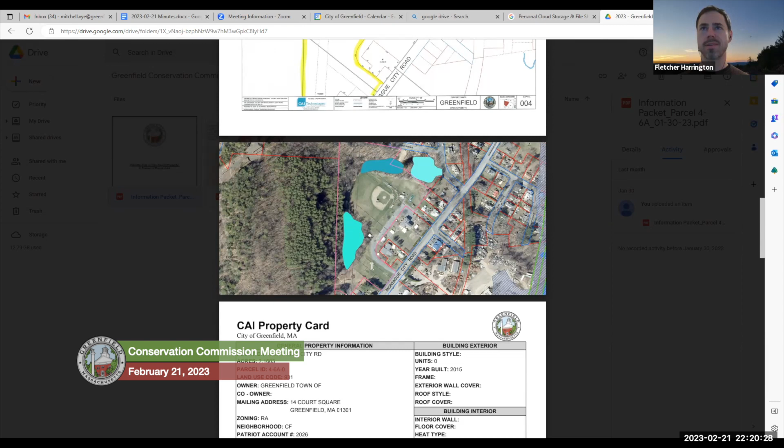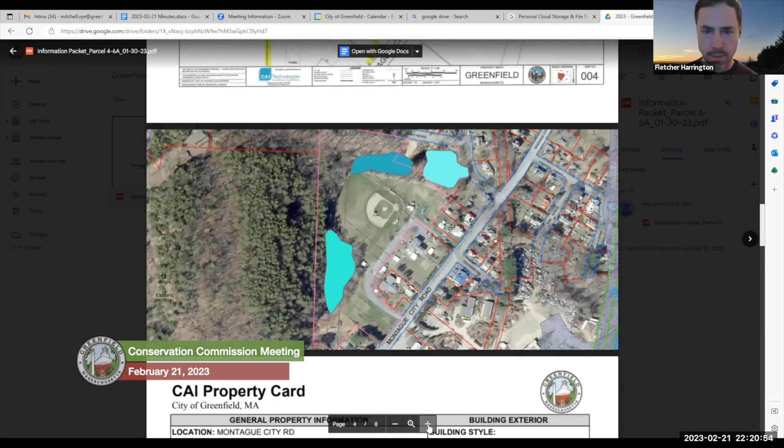Bordering the street that is surrounded by that gravel or paved driveway, isn't it? It says 6A. Mitch, can you go to the overhead again? It's within the middle there, right? Maybe go to the... Yeah, I mean, it's this area. Right.

4-6A-0 is open space right now, and it is the ball field, and it includes this C-shaped parking area. And that's under existing conditions right now. That is open space, municipal open space.

So what are they proposing to sell? Just a sliver, just the parking area? So then where are the future people who come to Abercrombie Field going to park? Looks like it might just be the inside of the... It's a sliver of the drive, not the whole paved drive. Oh, I didn't get that.

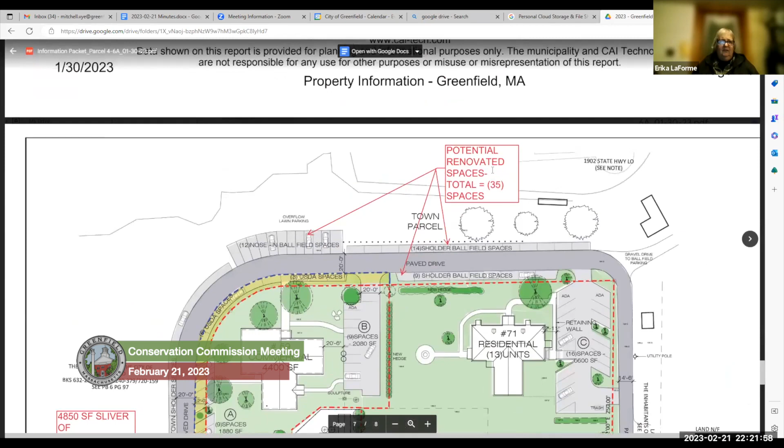Maybe it's just that one little notch. Is that big enough?

This is a terrible information packet right here. Yeah, we can't do anything quick, it's incredibly misleading. Well, I don't think we get to delay this or anything, right? We should respond, but we can't continue this and say, you guys are gonna have to wait, because we're tired or just because we need more info. I don't think they care.

Sorry, the portion of 4-6A—okay, I missed that portion in the first review. That abuts his property for future development project, approximately 48... Okay, so it is just that little sliver. That's 4,850. Okay, I guess that's clear down there.

I don't understand why it's saying potential renovated spaces, which is not in the sliver. Well, that's either for the field, I think. But what does that have to do with it? Okay, let me read this again. Also included in the area.

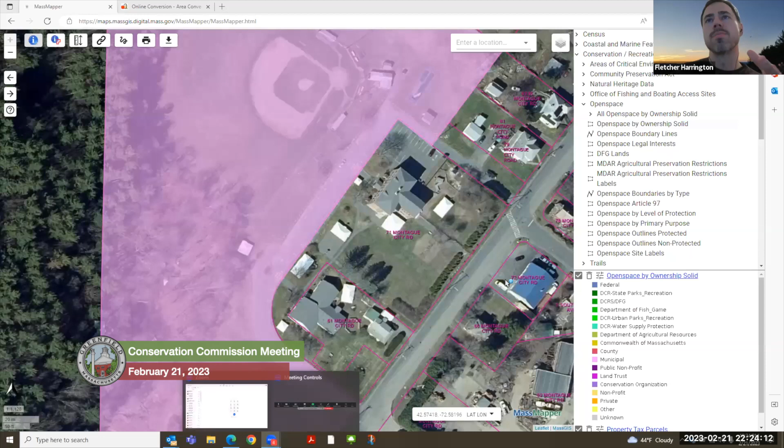So they will be displacing parking, but there's no narrative to say what they're trying to tell us by saying potential renovated spaces, unless they're proposing to sell this little sliver of open space, and then they're building more parking to make up for that in this other existing owned open space. That's what it sounds like, yeah.

Yeah, they're just selling this little sliver because there's a new proposal for redevelopment there for expansion, right? I think so. I don't think we have a particularly strong interest in this one. It'd be nice if they weren't encroaching on the field, but as far as Conservation Commission, this isn't number one conserved land. It's not under our jurisdiction, or our care. It's a tiny sliver, I don't know that this warrants as much time as we've already spent on it. Agreed.

We can just recommend that they move forward with the sale, I guess, right? Mitch, you can pretty that language out, I guess. Was that a motion? Oh, do we have to make a motion on this?

Well, I'll make a motion, just in case, that we support the town's sale of 4,850 square feet of lot, let's see, Parcel ID 4-6A-0 in Greenfield. We support that.